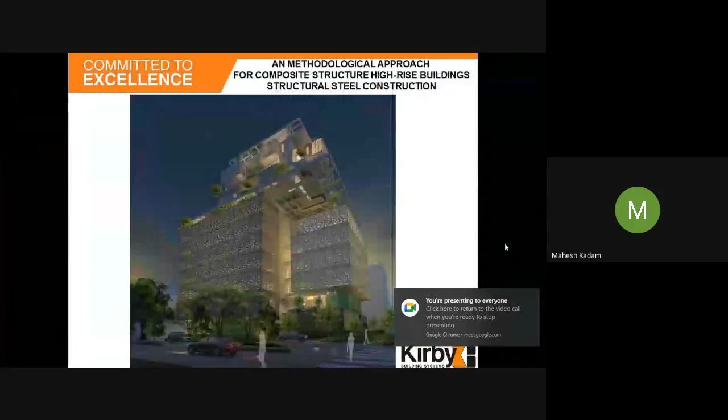Composite structures are in vogue, they are fast in speed, so we can get an earlier break-even. Composite structures extract the benefits of both steel structures and RCC members, making sections more slender without defeating the strength. So we get a larger floor space, which is value for money, and the flexibility of steel gives advantages for easier, higher vertical movement.

What is in the composite structures? The composite structures has 3 main constituents. One is the composite columns, which we call CFT columns, or we can have a simple non-composite I section columns.

Composite beams, steel I section beams with the girder and joist beams as intermediate members, connected with a composite slab with shear connectors, and reinforcement steel placed on that for shrinkage and temperature stresses.

In the design parameters, we refer to a number of design codes for dead loads, live loads, wind loads, imposed loads, and special loads. For seismic loads, we refer IS 1893. For concrete reinforcement, we refer IS 456, SP 16, SP 34.

For the steel structure design sections, like plate sections for flanges, for webs, and plate connections for beam connections, we refer IS 800.

For connections, mainly steel structures, these are prefabricated steel structures we get from the plant. There are 2 types of connections: nut bolt connections and welded connections. We dominantly do the nut bolt connections, for which we use HS bolts, referring IS 4000.

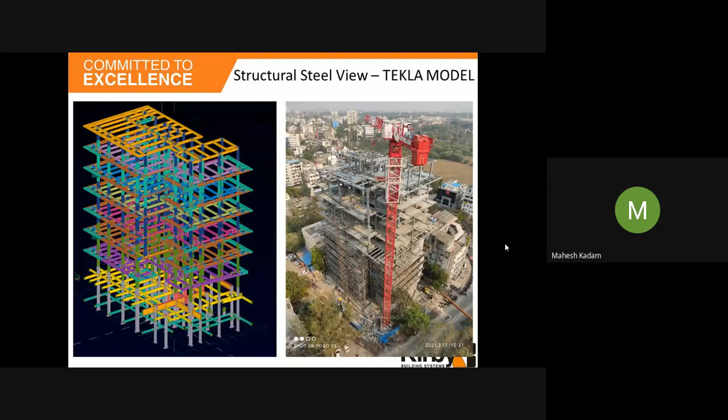Time is an essence of a project, so we need to understand our project timeline. For any project, we make the timeline from the LOI, from the conceptual stage, to the engineering stage, to the execution stage. Here, as we are the contractors, we are taking the timeline from the LOI date.

Till the total work breakdown is done, interlinking all the other dependent activities, with interdependency with RCC works, concrete placing, flooring, and so on.

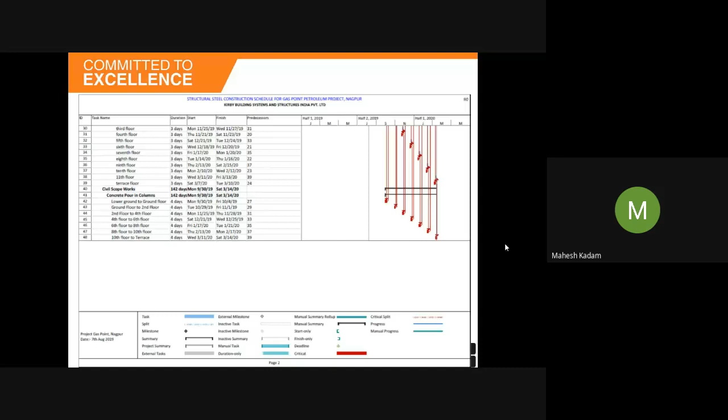For manufacturing, we have a very state-of-art fabrication facility located in both our plants. Here we are focusing on our Hyderabad plant, where we have a sophisticated CNC machine controlling the three-axis beam drilling and saw cutting line.

We have the production capacity for structural steel, even very complex jobs. We have a separate line that caters for 1,200 metric tons per month, with a beam depth of 1,000 mm and a drilling diameter of 40 mm.

For steel structure fabrication and welding, we have well-qualified coded fabricators and welders using FCAW, MIG, SAW welding, and other equipment methods, along with CNC tools and machineries.

For all the butt joints, we do DP testing and UT testing, and we have traceability from the coded fabricators and welders doing the work. So we do proper tracing of the materials, how it is done, where it is, and who has fabricated the beams or columns, so we can really understand it.

For checking, we have trained quality inspectors, because in high-rise structures, which are more dynamic since wind load acts as we go vertically up, we have to be more stringent about quality standards, and it has to be closely monitored and executed. Next.

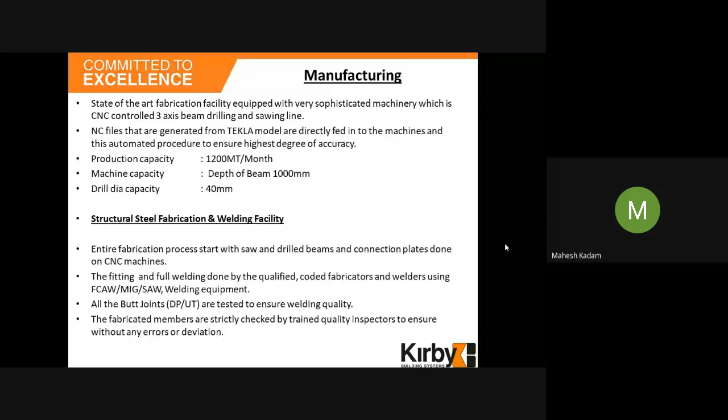This is typically what happens in a plant, prefab plant fabrication. There are multi-torch cutting machines for faster plate cutting, because these are all the end plate connections on both the flanges and the webs. So for the end plate connections, we do the torch cutting, and from that we extract the plates.

Then we have the submerged arc welding machines for very fine and quality welding of the end plates or the brackets and all. This is a typical built-up line fabrication, where the sleepers are there on which the columns or beams, typically I sections fabricated, are placed for the stiffener weldings and checking, the welding finishing, then the fitments, the brackets and all.

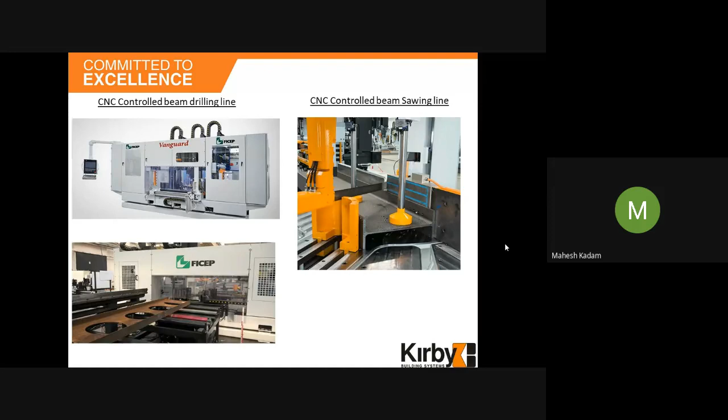This is what we call the sophisticated FICEP machine, which gives you a very fine, great tolerance for saw cutting and 3-axis drilling. What happens in this machine is that whatever outputs we take from Tekla, those are fed directly to the CNC machine, and accordingly the job gets done on these members.

A typical fabrication plant. The members which are fabricated as per requirements, we have to do blasting to achieve the surface finish of SA 2.5 standard, and then it is made ready for paint applications.

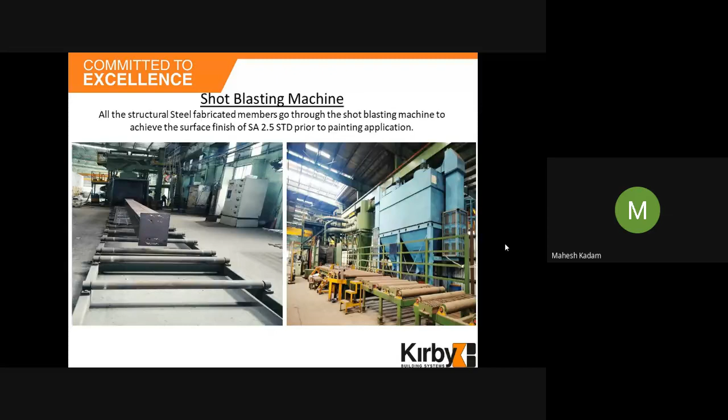That building height is 57 meters above ground level, and the cellar is 8.5 meters. It constitutes a lower basement, upper basement, coming about 8.5 meters to the ground floor level. Then there's a lobby area, reception area. 6 floors are office. The 7th floor is a service floor plus refuse area. And above are 4 floors of the duplex residential area.

The total steel component is 1850 metric tons and the deck sheeting is 1126 square meters.

So how do we do the work breakdown? Each column's transportable length is around 12 meters. So 12 meters means how much - we can cover about 2 floors. So per column, 2 floors of beams will be there. So how many members are there? 2 floors have 284 members. So 284 lifts will be there.

Per crane, how many lifts can we do in a day? Then how many days are required? Deck sheeting - what is the square meter of the deck sheeting? What is the average area laid per day by a team? And how many days are required for laying it?

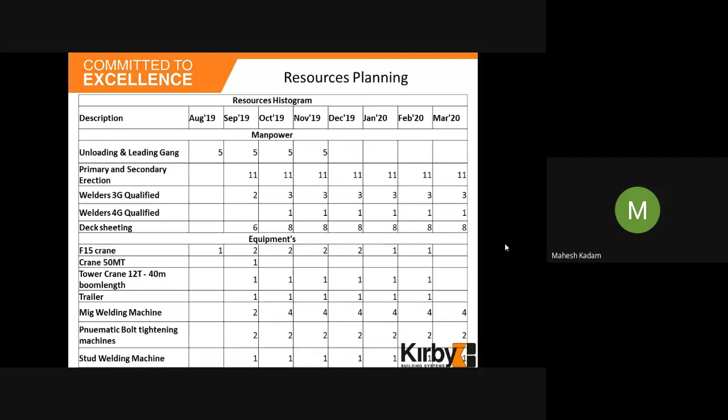Any structure, when we go about it, we should have a clear-cut erection method statement. Now, to get more clarity on the project, we need to specify the description of the project, what is the location, and what are the materials involved, that is the columns, beams, deck sheeting and all.

Then the members, how they will be erecting members, the erecting team, how it will be there, erecting equipments, then the tools and tackles. We have to in a very detailed way, at a micro level, do the study about it and put all those details so there should not be any miss when we are doing it. Then what is our safety plan, how it will be moving and all.

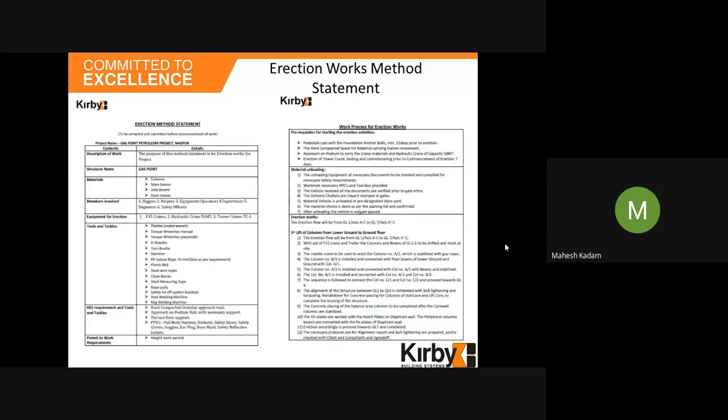Next, what is the prerequisite starting points and all about it, how we will be doing it. We have to clearly capture where the tower crane will be placing, what are the column connections, how the column connections will be happening, how we will be erecting it, how we will be placing it.

Any detailed minute part also we have to capture in this work method statement, and it should be documented, well documented. So this document becomes a Bible for our project execution.

Any project, what we have seen is that wherever high-rise structures come, what we have is paucity of space. What is that? Paucity of space. In city areas, where high-rise buildings come, we have area occupied on all the four peripheral sides, so we do not have sufficient area to stock our materials, what we are getting from the plant and all.

So we have to do a perfect planning to make it just in time. When we are making it just in time, we bifurcate the project based on how much it can be catered, how much space we have and how much it can do. So what we have done is divide this floor plate into two parts, priority 1 for grid line number 1 to 4 and priority 2 from 4 to 8. This is a phase plan, which we give to the plant backend also, and we do the planning about it, how the fabrication has to be done in this plan, what should be the sequencing.

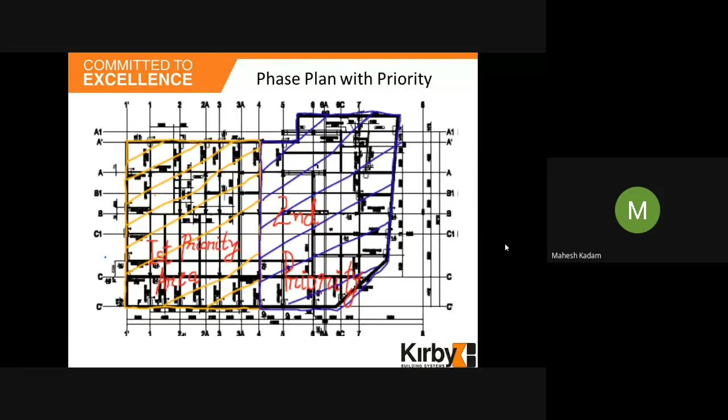Detailed list of our equipments, tools and tackles, right from the D-shackles, torque wrenches, at every minute level we have to chalk it out and plot it up. What are the chain blocks? What are the tons of the chain blocks? What are the retractable fall arresters and all? We should very speculatively jot it down on the paper.

Now another part is that whenever we are working in a high-rise building, there's the crane movement, where the crane is to be kept, where the crane is to be placed, because of the scarcity of space and all. So the demarcation of it is very clear. We have to be more clear about where the tower crane will be placed, and it will be executing without any hampering of the work progress, not only of the structural steel but also the civil works.

And what happens is that when we go higher up, it cannot happen that the entire building structure is completed and then the interior and finishing people come inside. No, it will go in a ladder activity. So as soon as we reach above the 5th floor or 6th floor, the below floors, the interior work starts.

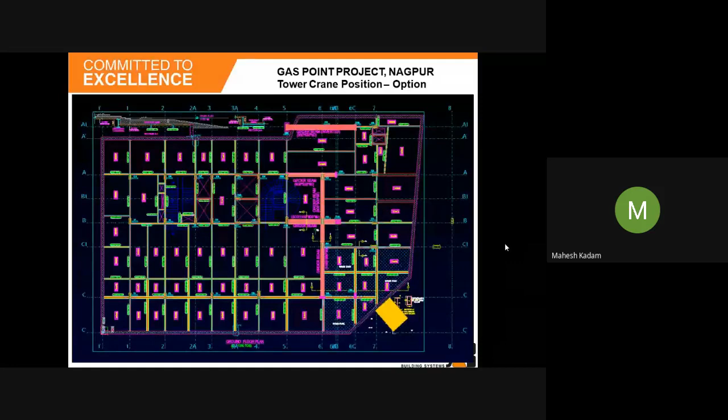So we have to be very clear about how the tower crane is to be placed. It cannot happen that the tower crane, our equipments, we are placing on somebody else's land, it's not possible. Now, in this project, we have two sides that are a road, it's in the heart of the city of Nagpur. So both sides we have a road, and on the other two sides, one side is our school, and the back side is a hospital.

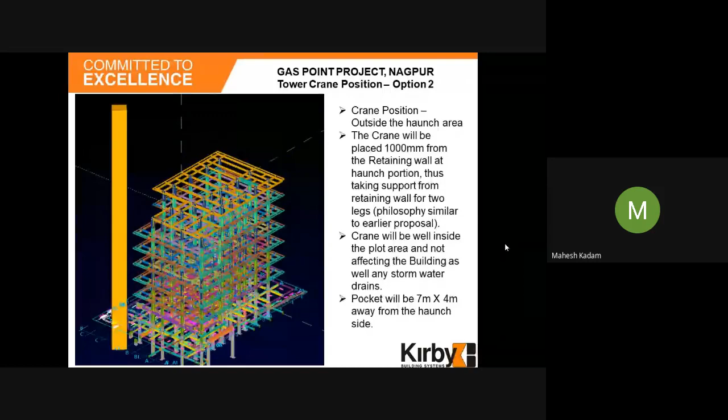For the tower crane we are placing, we need to understand the load carrying capacity and the boom length. As per the boom length, the lifting load carrying capacity of the tower crane changes. So we need to clearly plot our layout plan, and on that layout plan, we also jot down the lifting capacity of the tower crane.

As per the lifting capacity, we can make the steel member segments accordingly and give it to engineering for detailing and fabricating accordingly, so we can reduce the number of lifts. We can play with the lifts and save more time in this. This involves very accurate planning and execution.

This is a 3D view of the project, showing how it will go upward. When we are going upward, below the line, the deck sheeting and concreting has happened there.

The center part has the core walls. These are the lift core walls, and on all four peripheries we have staircases, fire escape staircases, and shear walls. Generally in these high-rise composite structures, the central core wall is an RCC wall, which acts as the spinal cord of the building, and the steel structures get connected with this spinal cord, giving us vertical alignment of the structure.

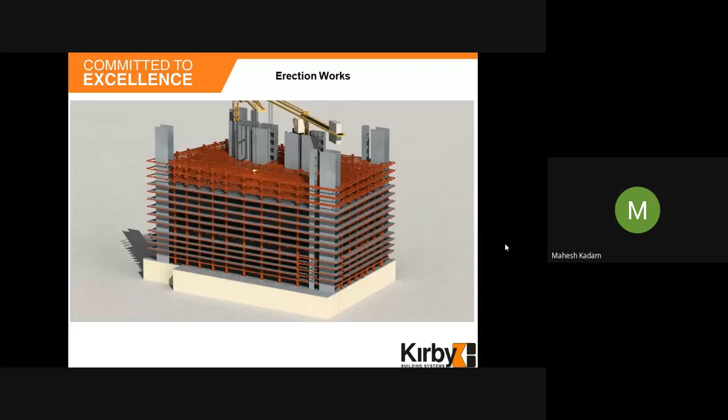We have a very detailed field quality plan, like a quality plan for manufacturing where we have MTCs, what we are doing at the plant, the cutting, the welding, welder qualification, welder quality checks, and material post-fabrication quality checks. Similarly, on site execution also, we should have a field quality plan.

In high-rise buildings, for any steel structure, the first point is about the anchor bolts. Anchor bolt setting is very critical because we need to know how the structures will be set. For the anchor bolts, we have to clearly note the center to center distances, the height of the anchor bolt above the concrete surface, the tolerances, and which codal provision we are following.

Next one is about the column base plate: what are the levels of the column base plates and the tolerances. For structural steel, we refer to IS code 12843 for all the tolerances and specifications for the erection works.

Checking the main column verticality, IS code specifies L by 1200 for a 30-meter building, and L by 1500 for structures going above 30 meters.

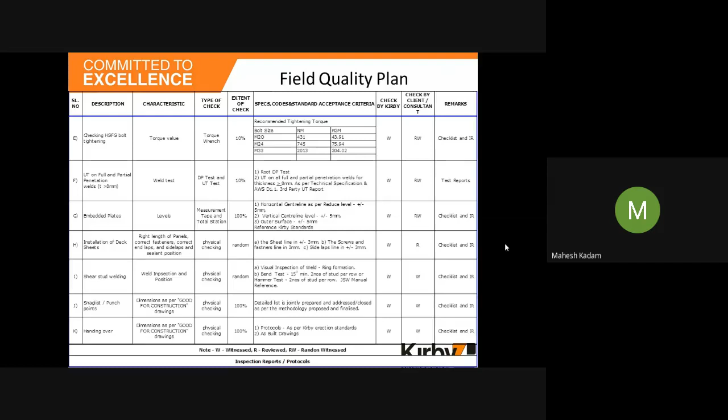Next, anchor bolts. These are the typical anchor bolts. We use 8.8 grade anchor bolts for high-rise structures. Anchor bolt setting, as I said very clearly, is very critical, and we have to be more stringently followed about it.

We use a total station for checking it. The northing easting points are marked as per the layout, and each and every bolt is checked, because in a column pedestal there are a number of bolts. So we take it as one cluster, and for that cluster we have to check what is the northing easting, whether we have achieved that northing easting or not, and how much tolerance is there.

Secondly, the box column is away from the center line. What we do is get from the architect drawing the center line about the structures, center line about the columns of the foundations, center line of the column. But here what we are using is box columns, CFT columns, or I-section columns, so that center line won't be visible.

So we have to transfer it to the edges, to the northing easting point. These northing easting points become a base which we have to follow from the anchor bolt level, that is the base plate level, till the top of our building, whether it is a 72-meter height building, a 67-meter height building, 83-meter height building, or any 100-meter height building.

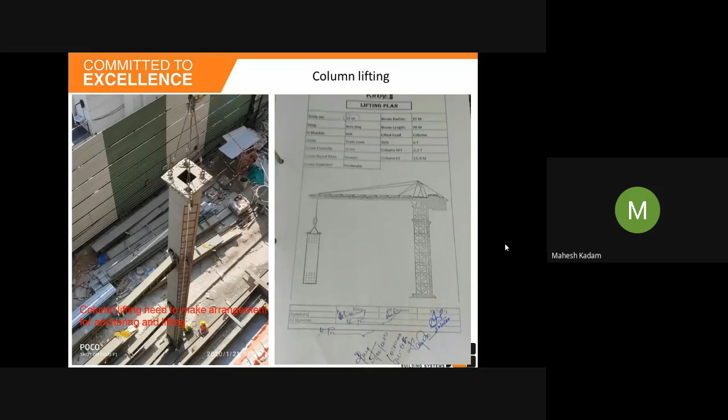Next, when the columns are placed and the minimum main beams are provided, we come to the next point about the protocol for a verticality check. Verticality check is more important, what we crudely call a plumb report. Now what is verticality? That is the northing and easting which we have passed on the base plate of a column, and we are checking that northing and easting.

So for any 73-meter height building, for example, L by 1500, we get a tolerance of 46mm. So at the base plate level, at ground level, and when we check it at 73-meter height, the tolerance for the building should be that each column's northing and easting should be within 46mm only, not more than that. If it is getting away, then every lift of a column, what happens? A 73-meter building cannot go with one column. We get it as columns within a size of about 12 meters.

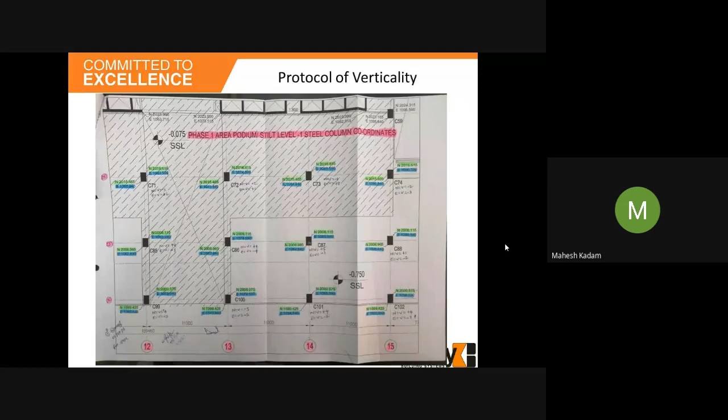Columns and maintain it within the tolerances.

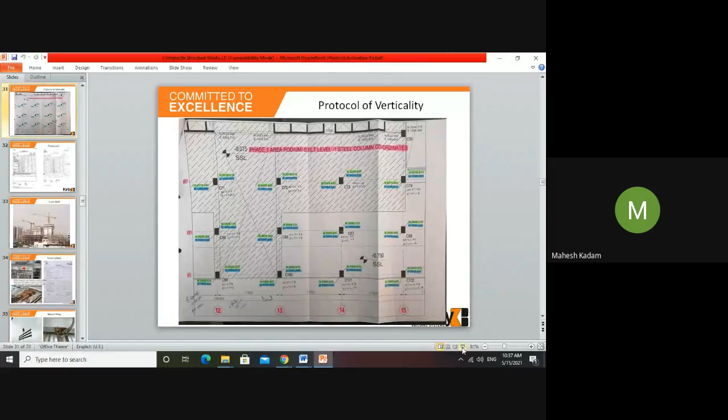We maintain the protocols of the columns vertical stage by stage, which are jointly signed. We check it with a three-tier checking process. One is the site people who are doing it, the second is the consultants, and third is the client team also. So we get a three-tier checking, three times we check it up, yes it is checked and we are going ahead.

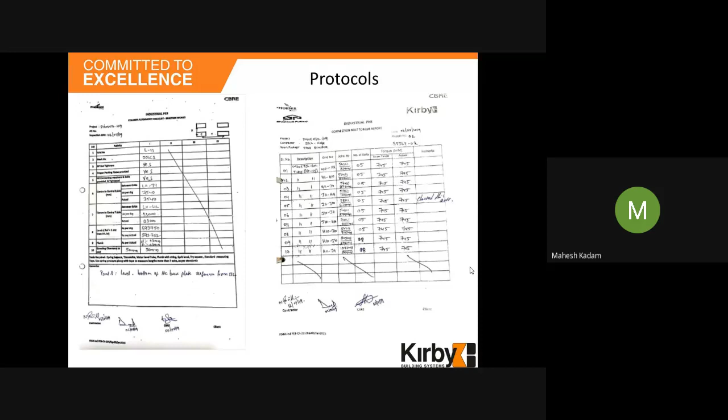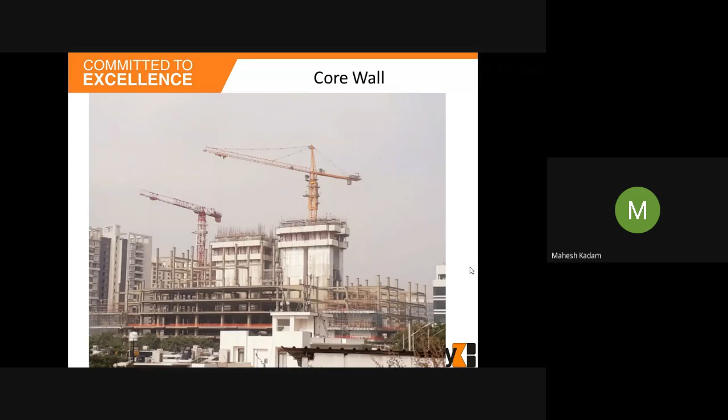So what I showed you about the 3D model - now this is about the actual core wall, how it will be there, and the columns and the beams, connections and all. Insert plates.

Now what we are seeing is that the core wall, the beam is going to get connected with this core wall. Core wall is a concrete structure done with a slip form. So slip form column, concrete structure, the beam has to be connected. Here we need to have a steel plate. So what we do is provide IP plates, that is the insert plates, to which the beams will be connected with our cleats.

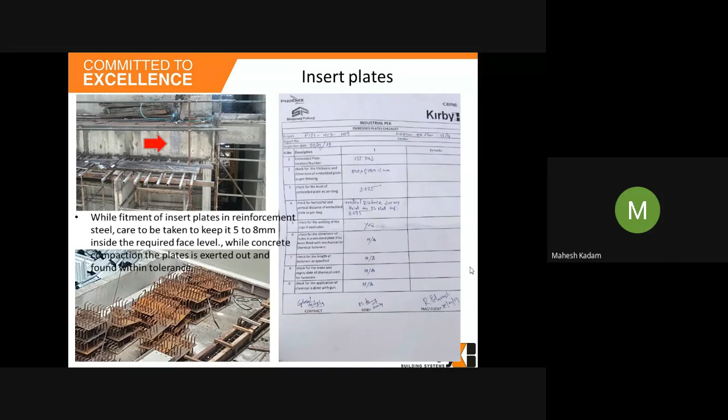Next part, number of lifts. The beams are the lighter beams, so the beam weight per beam will be maximum 800 kg. In this structure, we have 11-meter beams at 585 kg and 8-meter length beams at 386 kg. With such beams, we can go with multiple lifting. We have to very clearly mark out the CG of the beams and provide multiple lift brackets, tying it and lifting in one go.

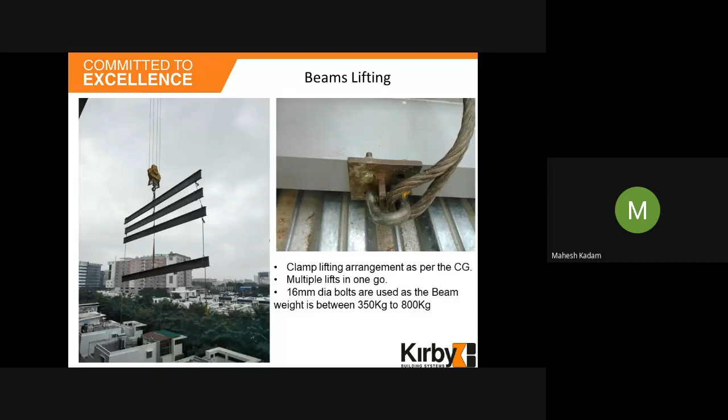So what will happen is we get the beams - if we go with 4 beams, the number of lifts are reduced. This gives us speed in the structure, moving faster. The crane movement will be faster.

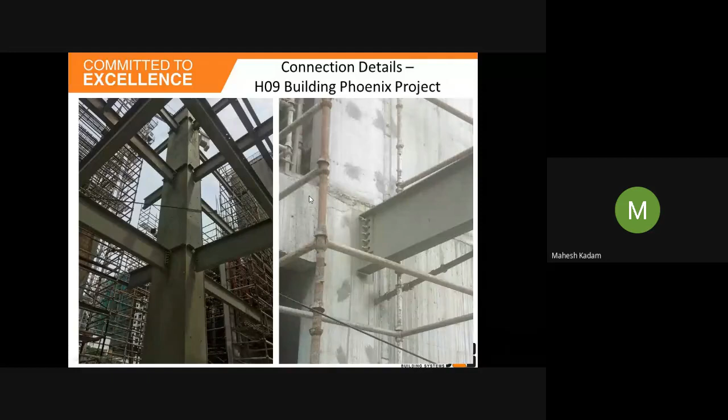So if you see on the right side, the picture shows the core wall, that is an RCC wall, with the insert plate, where the beam gets connected with the fin plate. On the left hand side, we see the main CFT column, a tubular column. For the tubular column also, there is a fin plate to which the beams are getting connected. When the fin plate and the beam connection is happening, we call it a shear connection.

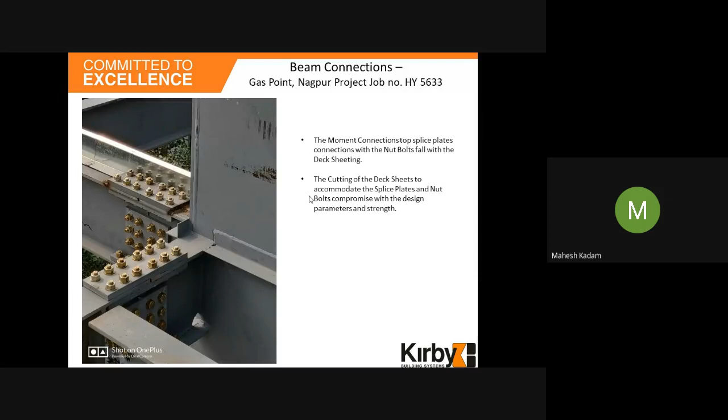Now this is a typical detail about the moment connections, wherein there is a bracket welded to the CFT column, and for the bracket we connect the beams which have a splice plate from the top flange and bottom flange also, and in the webs. Typical pictorial of nut bolt tightening.

In a high-rise building, we have to be more cautious about safety tools and tackles. What are the safety tools we are using? This is the beam roller, which anchors with the beam top flange, and your safety harness is connected with this. Any spanner or tools and tackles, those have to be tied with a tagline. So nothing - you have to avoid a fall.

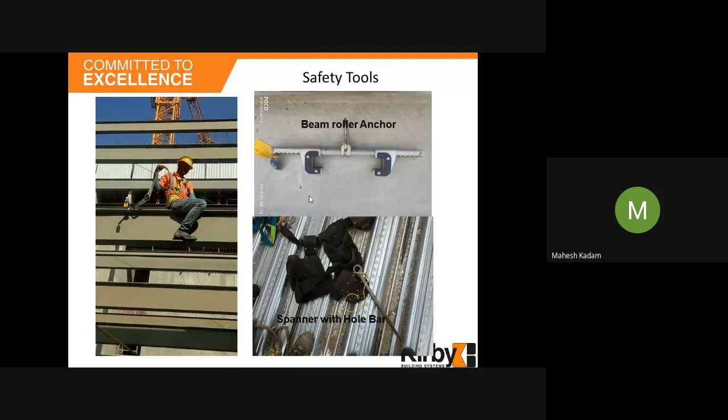Next, fall hazard. This is a typical battery operated torque wrench, wherein if you see in the picture, 4067 Newton meter is the torque value of a bolt. So this BTM 3000 lithium, which we used in our Phoenix project, has a minimum torque value of 678 Newton meter and maximum of 4076 Newton meter torque value. So we fix the designated torque value and start operating the machine, and the bolt is tightened to that torque value, and automatically when this torque value is achieved, the machine stops. So we get the defined torque value - the nut bolts are tightened at a defined torque value.

Second challenge is that when working in a city area, there is noise pollution. Steel works are happening, concrete works are happening, continuous machineries are working, and people staying in the vicinity get annoyed. In this project, where there were affluent people nearby, they started complaining, so we were forced to go for a thought process. We tied up with ABS and brought down the noise - a less noise generating bolt tightening machine of 35 decibels. Our pneumatic bolt tightening machine makes 95 decibels, while permissible noise in city areas is 40 to 45 decibels.

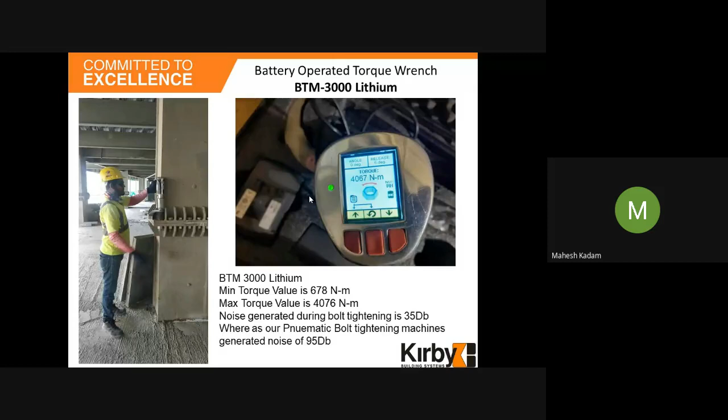As earlier discussed designing as per IS 800, there are 4 types of main connection detailing: column to column connections, column to beam connections, main beam to secondary beam connections (those are the joist beams), and core wall to shear wall connections.

In these connections there are two main types: the fin plate connection, which is a shear connection, and the moment connection, which uses the beam bracket with splice plates.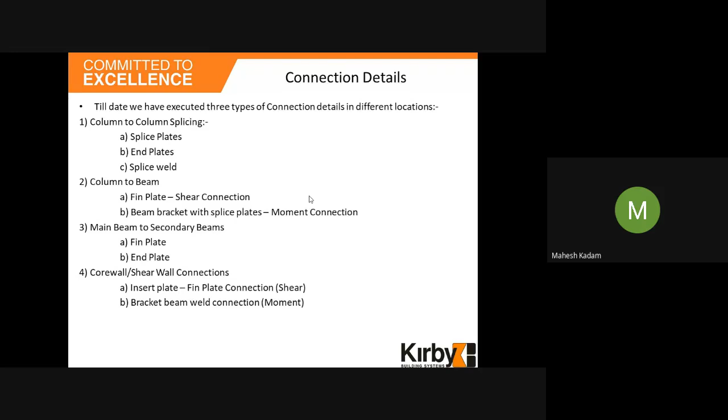For column to column connections, we have three dominant types. One is the splice plate connection for I-section columns. Then for I-section or CFT columns we can have end plate connections, and also splice welding connections.

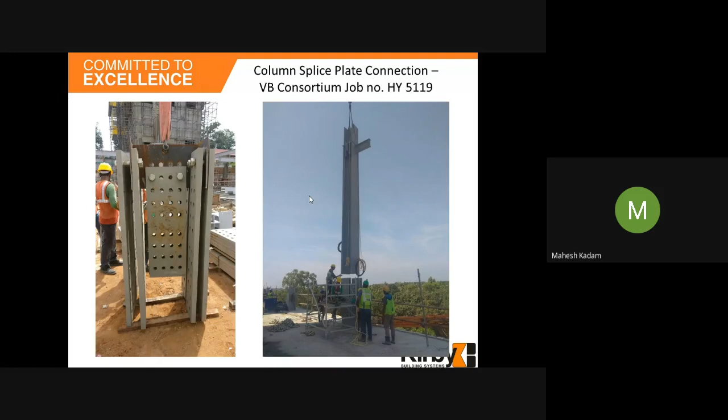With this type of erection, we require only 4 to 5 people on top. That is the beauty of this method of working.

I derived one method after a lot of thought process went into achieving safety when working vertically up to 10 or 20 meters height. On peripheral columns outside the structure, we have to be more careful about the safety of the person de-shackling the column from the crane.

For de-shackling, we use the remote ground release shackle. These are dominantly used in heavy engineering works, generally in shipbuilding and power projects. This was the tool we derived, did a lot of Kaizen on, and developed in our factory.

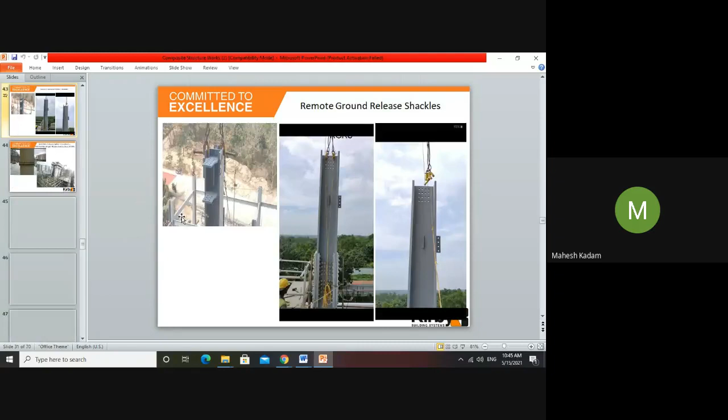Tapasiji, on the left hand side there is a photo. Can you click on that photo? Double click it. It's not starting, okay, take it, leave it. Let's go to the next slide.

Here I wanted to show a video clip. In the remote ground release shackle, there is a cotter pin and a piston. First, when the column is placed and tightened up, we remove the cotter pin, and then people standing on the bottom platform pull and push so the piston is brought back down, releasing the column from the crane.

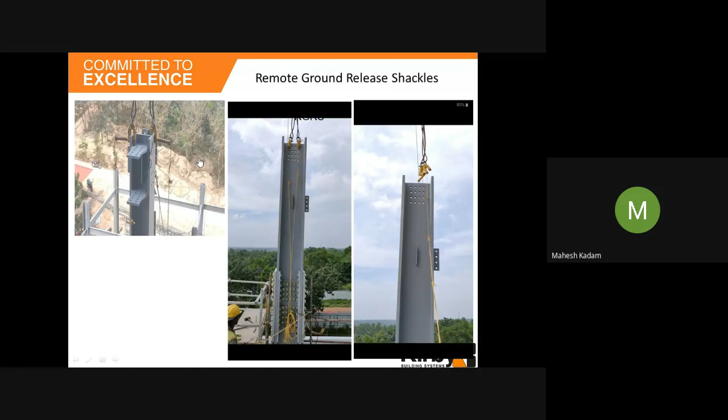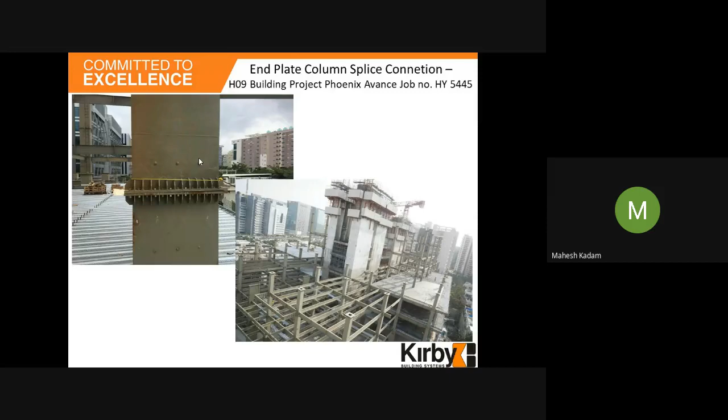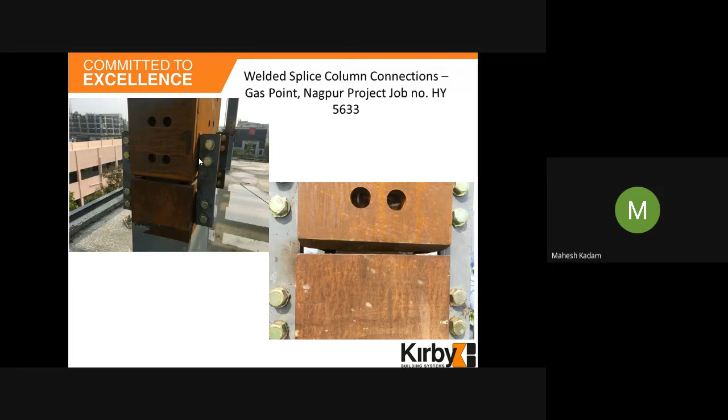This is the third type, the weld splice connection. This is also for tubular columns which are concrete infilled, but here there is no nut bolting, it is a welding connection. The plates and nut bolts you see are only erection bolts. Once erection and alignment are done and welding happens, these have to be cut and removed.

These are typical male-female connections. You can see in the bottom columns there is a red colored projected member. When erecting the columns from the top, unlike the splice columns where we used a crocodile method, here it will be a typical male-female connection.

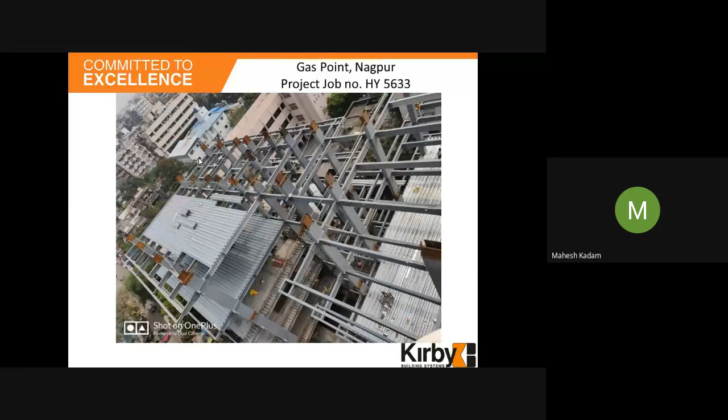Site welding, root and all for the welded connections. Here you can see the connection plates, where the erection plates are removed.

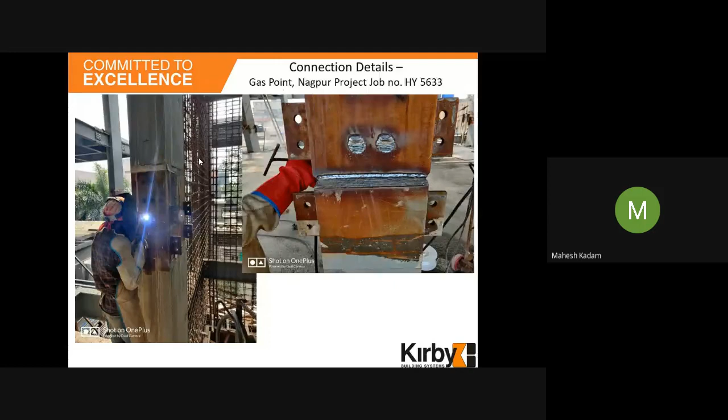Next, when we do the welding on site, any welding, we have to be doubly assured about what we are doing. So for root welding, we do 100% DP testing.

For welding filling, which we do with MIG welding, we did UT testing. For the columns, we did 10% UT testing, and for all the horizontal members, since they carry the load from the top, we used 100% UT testing for the beams, box beams and box girders.

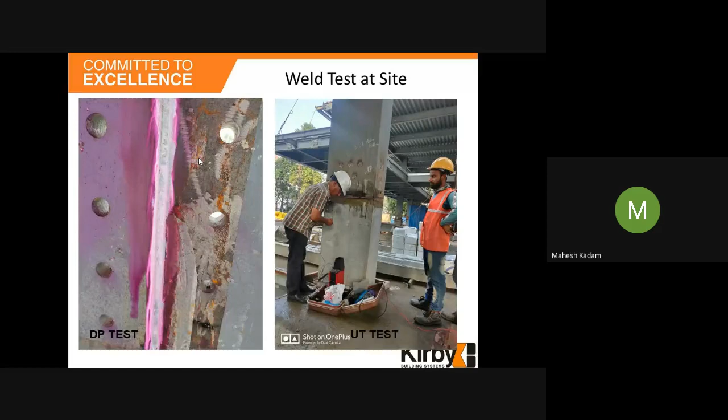This is the project we did for Suntec in Trivandrum. Singapore-based design by Zhurong, PMC by JLL, and executed by Kirby.

This is a beautiful architectural building. At bottom levels 54, 58 and 62 meters, you can see the cantilevers projecting outside the building in all directions. On the left hand side, the cantilever is 10 meters away from the building, and on the right hand side, it goes 5 meters away from the building.

This was a big challenge when we took up the job. We were involved right from the engineering, deciding the positive camber to be made, the box sections, how the tubular sections should be fabricated and connected, and how the erection should happen.

At 54, 58 and 62 meters, these three outer cantilevers had major safety concerns and hazards. There was no chance we could do the connections from the ground, so people had to travel outside the building to do the erection.

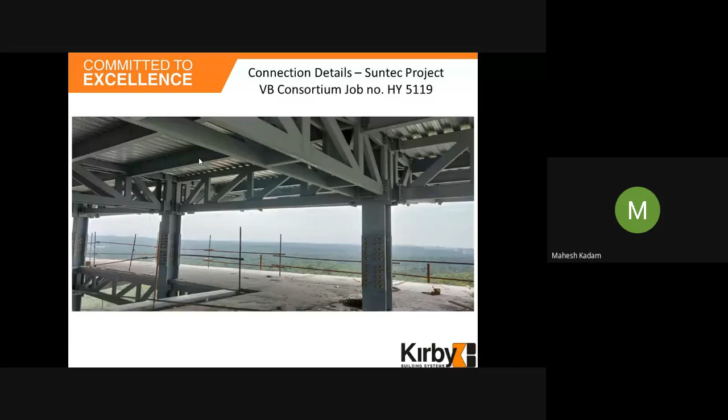These are photographs showing how difficult the task was, with people coming out of the building to do the work.

Our challenge was that we did a pod lifting. As shown in the yellow hatched portion, we assembled the cantilever portion at ground level, and with the help of a crane, lifted it up and connected it with the main truss beams.

We also had to do a lot of site kaizen, figuring out the philosophy for how to make the deck sheeting. Safety was a main concern, and we achieved it through a lot of engineering, brainstorming and simulation, successfully executing the project.

The entire structure has a positive camber of 10 mm.

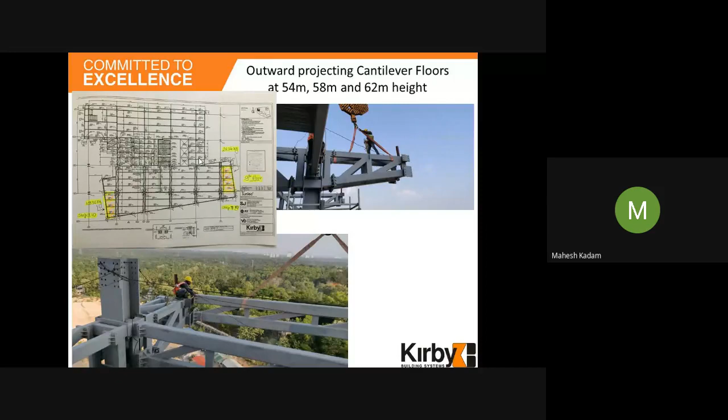Now we'll come to the last part of the project, the composite section, which is about the deck sheeting.

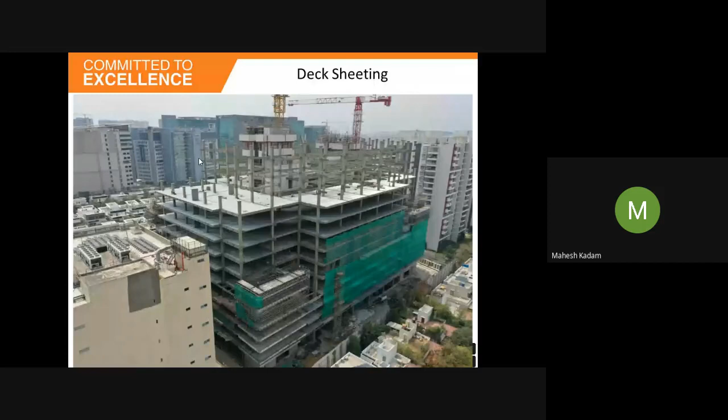In deck sheeting, there are a number of members involved. One is the profiled TR section deck sheets, then end caps so that when we have the profile sections, the concrete doesn't spill over from the profile deck sheets, which we close up with end cap flashings.

For fastening the deck sheets, we use SDTS screw fasteners, 16 mm by 19 mm, for sheet to sheet lateral connections, and 24 by 32 mm dia screws for deck sheet to beam connection fastening.

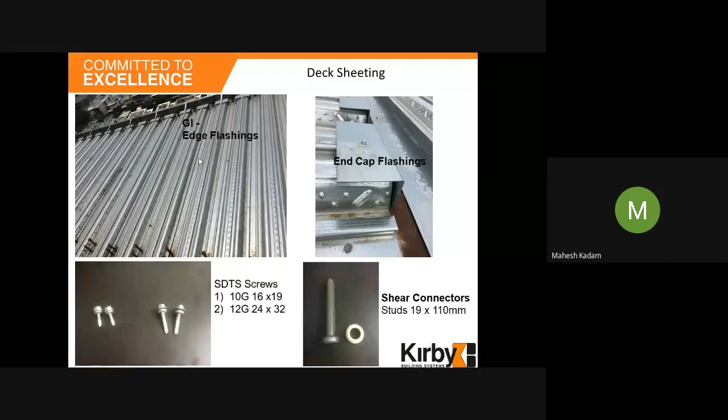On the right hand side are the shear connectors. This is the main part of any composite member, connecting the deck sheeting and the beams. The shear connectors have to be fusion welded.

This is a typical profile of a deck sheet, different from other deck sheeting seen in other projects. In a composite section, a typical TR60 or TR80 has a crown at the top.

This crown mainly acts in sharing and arresting the shearing of the members, so the concrete and the deck sheet are connected properly with no gaps generated. The concrete doesn't leave the deck sheet, and it ties properly, with the profile giving strength to the entire homogeneous composite member.

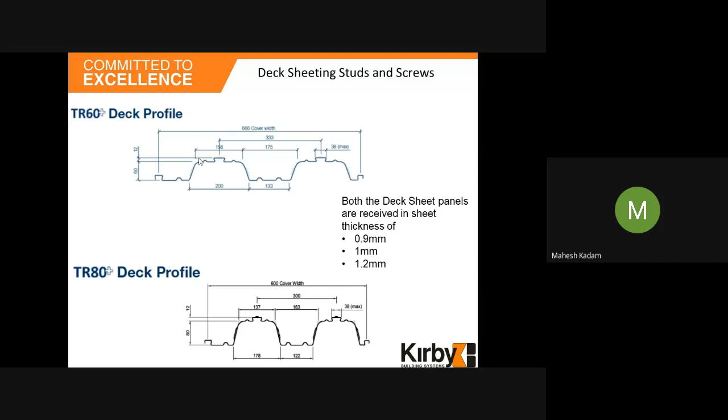Actually, my presentation has got stuck. Can you give me 1 minute? I will check whether I can load it again. Yes, I'll manage it. I'll stop sharing, sir.

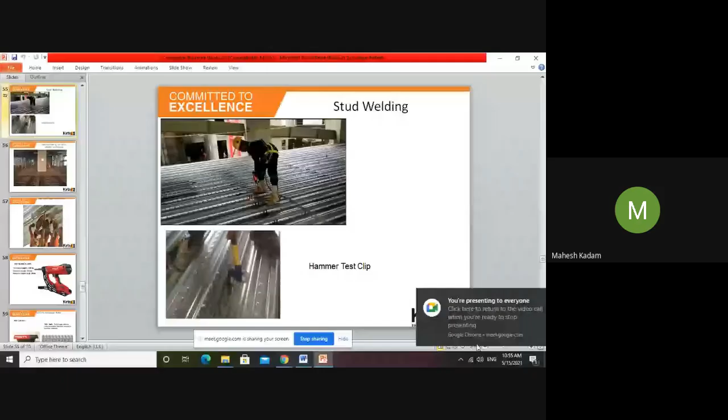In hammer test, what we do is hammer the fusion studs. We check it up with a hammering and bend test that the stud should not be broken away or sheared away from the fusion connecting between the deck sheet and the beams.

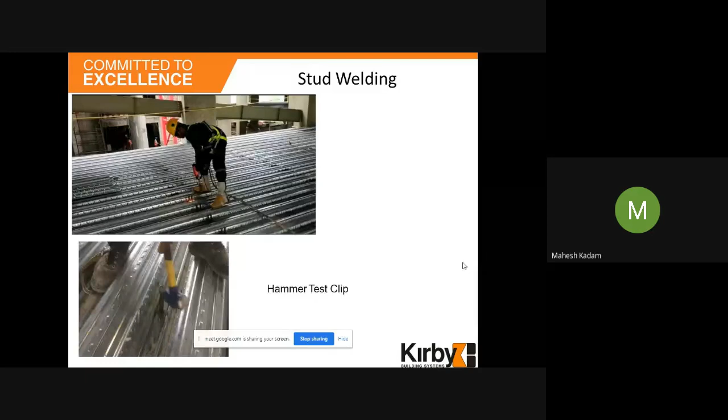Now this is about the case study of the data center project for the Ctrl S in Mahape. Here the designer has used the beams also, got inbuilt concreted with the deck sheeting, because in the data center the loading parameters are too high on the floor plate. So instead of increasing the depth of the beam, he has gotten composite action with it in totality.

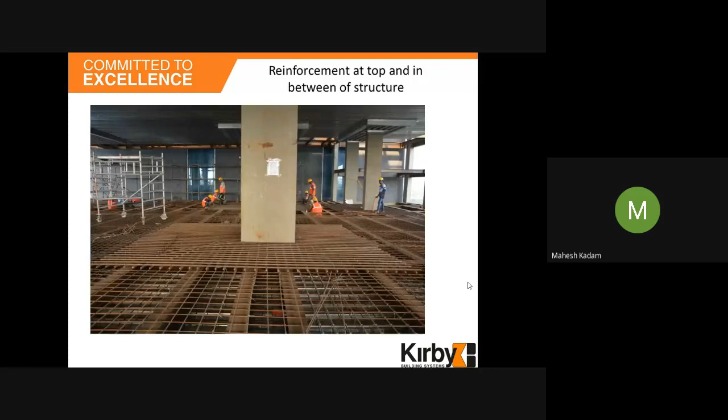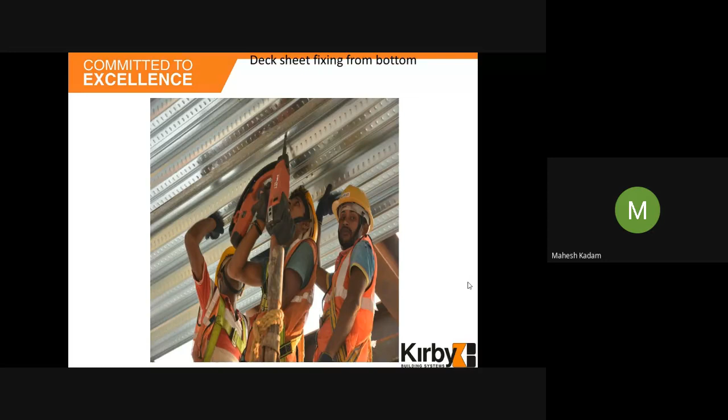So the deck sheets were connected with the beam in a soffit, and we use this for the connection. Normally our drilling screws cannot go in this position - it can go from top to bottom but not from bottom to top. So here we use a special Hilti gun.

This is the Hilti gun, which has a weight of 4 kg, a fastening intake of 40 nails in a cartridge, and the length of a fastener is 39 mm. It's like a typical bullet gun - we just place it in that location and shoot it, so the nails get connected there.

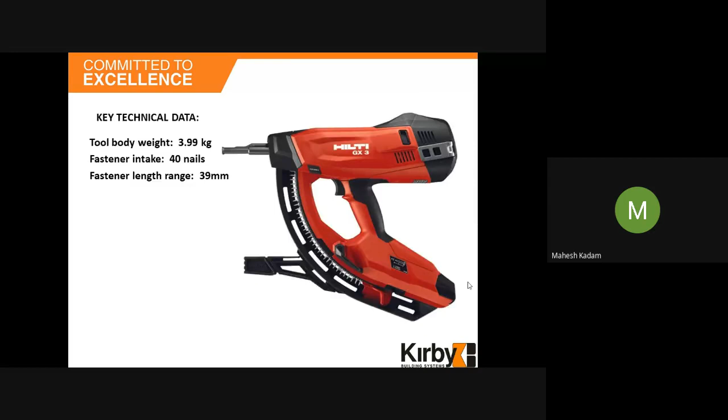This is a typical safe platform what we have prepared, and the people standing there connecting the deck sheet from the bottom of the beam.

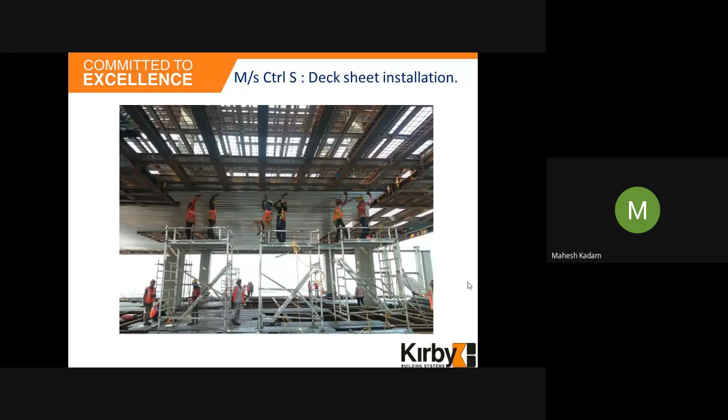This is a beautiful finish what we got from the bottom. It's really a great challenge to achieve such a beautiful finish with steel members. With the column soffit, if you check the beam soffit level, similar to what we call in our PT slabs and flat slabs as a column capital - similarly here the column capital is made.

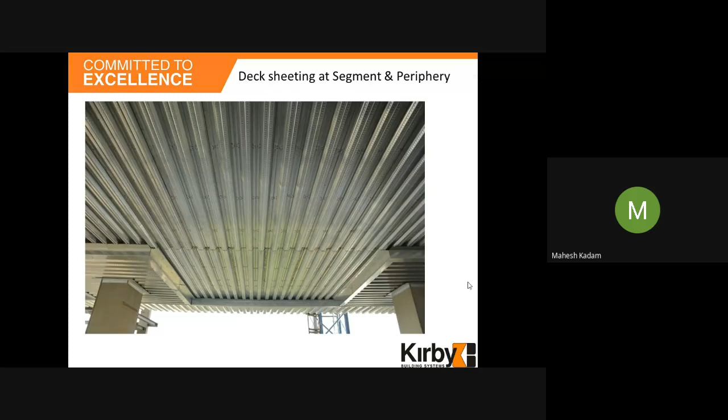Ctrl S building completed in Mahape, Mumbai.

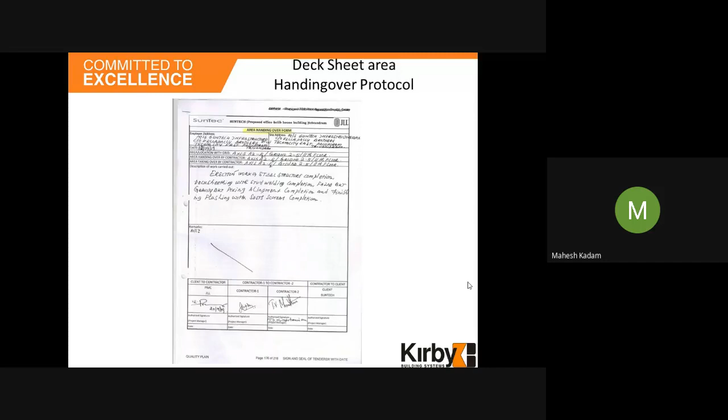This is a typical deck sheeting area handing over protocol. Any job we are doing, we have to hand it over to another agency, like the civil agency who is going to do the concreting. So that inter-transmission, we have to hand it over to the client also. This is a typical handing over protocol.

Now we come to the part of how we get the fire insulation. Generally the concrete, RCC concrete, is having - we get a 2 hour fire rating, but still it's a challenge. So we have to be more careful about how to achieve the fire rating for it. So deck sheeting is designed in such a way, composite deck sheeting.

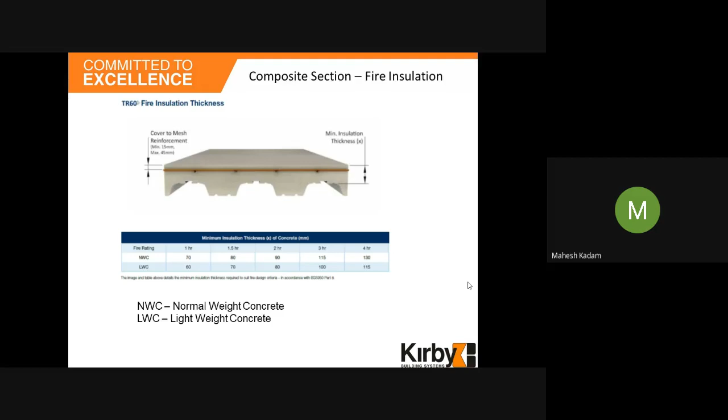So within concrete placing, for nominal weight normal weight concrete, with 90 thickness of concrete we get 2 hour rating. And lightweight concrete with 80 thickness of concrete, we get 2 hour rating. So this is the way, if you check up what is the insulation thickness, shown in the drawing also, and the cover also.

Now we talked about the deck sheeting. Now we have to talk about the horizontal members - those are the beams and columns. There are two types for the beams and columns which are exposed steel structures - we do two types of fire coating, fire protection coating. One is intumescent paint application - at increased temperature it expands at a ratio of 1:50, thus controlling the heat and temperature to reach the steel, and we get a 2 hour fire rating.

Next is about vermiculite fire stopping. Vermiculite fire stopping spray is a cementitious fibrous plaster applied with a spray gun. The normal thickness is from 10 to 70 as per the fire rating.

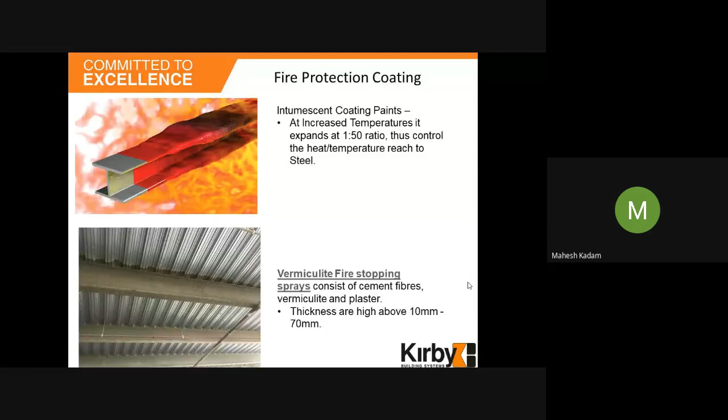Now you can see the beams which have a vermiculite coating. This coating has a very rough finish, so it's not aesthetically good. So whatever gets covered below the false ceiling, we can do with vermiculite coating because it is much more cost effective - about 4 times lesser than intumescent paint. But the columns are an exposed structure, so if we do cladding there, we'd defeat the floor space purpose. So on the columns and exposed surfaces, we apply intumescent paint.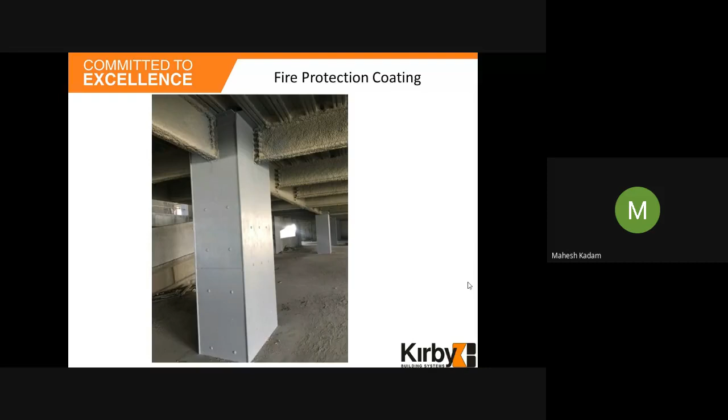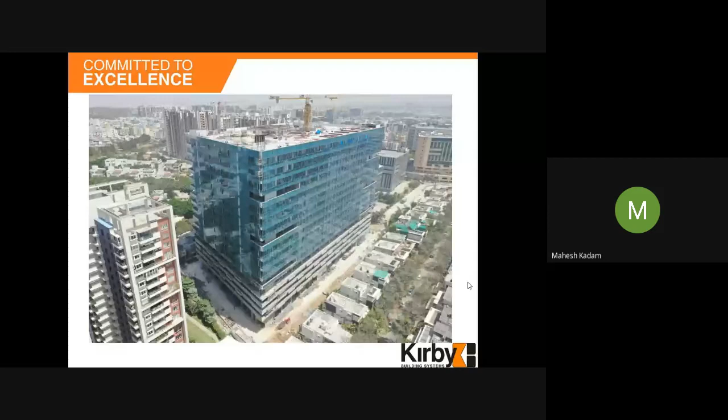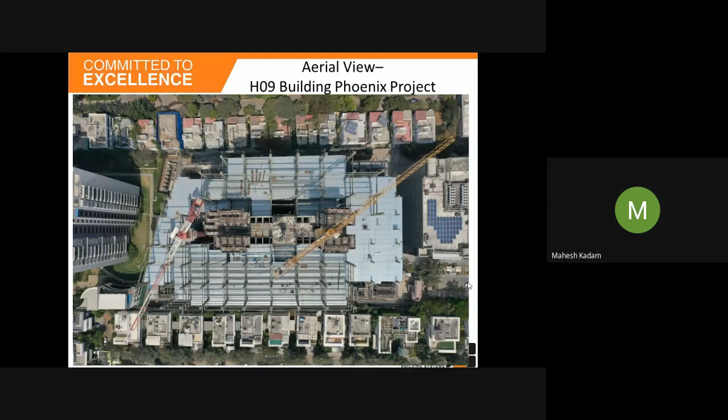It's a very beautiful, challenging building - both the cranes, because of space constraints. Because of the space constraint and very stringent norms of a residential zone, there should not be aerial coverage of any construction equipment above the vicinity buildings. So we had to bring both tower cranes inside the building. If you can see the yellow color and the red and white color cranes, both were brought inside the building, and we did the successful execution of this project.

All four projects - right from Trivandrum, the Suntec Trivandrum project, then the MAPE project Control-S, this Gas Point project in Nagpur, and the Phoenix project - all four projects we have executed, we have successfully achieved within a tolerance of 6 mm. We have not gone to 46 mm; we achieved it within 6 mm. All the columns are within 6 mm for this big height. That is the biggest achievement. We have achieved it with speed and quality.

We always say that in any project, there are three main parameters: one is safety, second is quality, and third is on-time completion. All three parameters we have achieved very successfully. There is zero time loss in any of our projects, so we have achieved safe man hours. The quality, yes, within 6 mm - all quality stringently checked, all quality parameters achieved, all protocols successfully completed, jointly signed off, handed over to the client, and timeline achieved, yes.

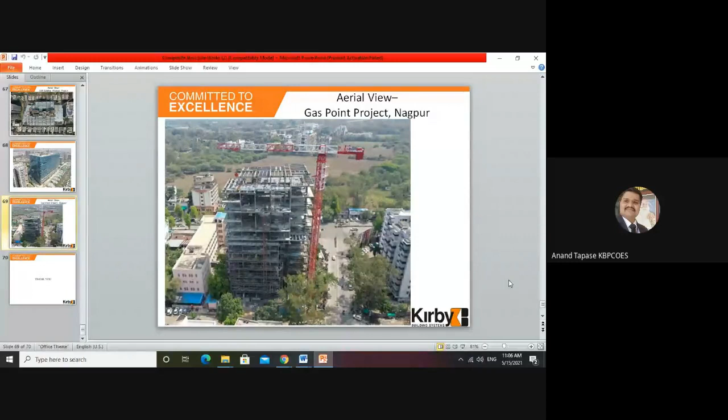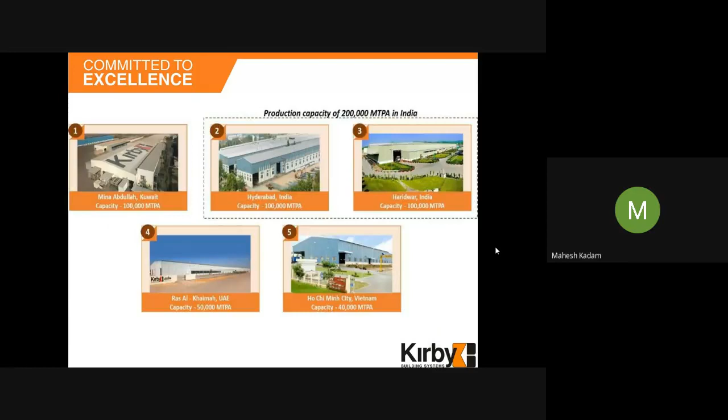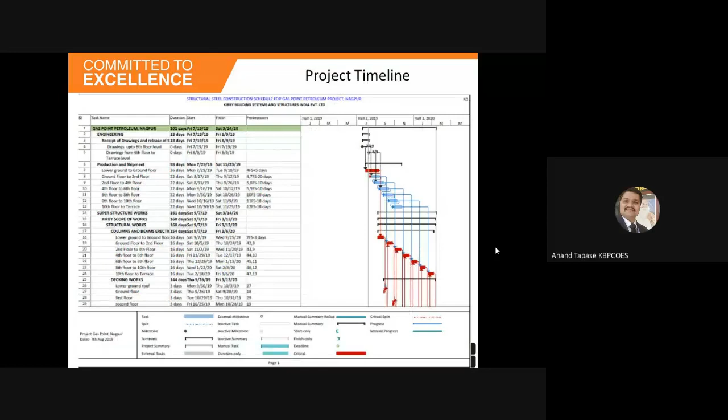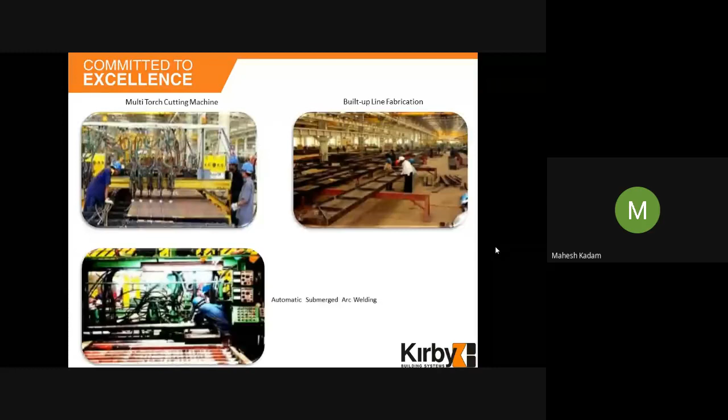The first one is, do you maintain a regular risk register during the project execution? Yes, we have to. We call it a project level risk analysis. At the initial stage only, we start it up - what are the risks involved. In the erection method statement, when we get the project, we go through a thought process and start plotting the risks. One is financial risk, whether there's any financial risk. Second is timeline risk, safety related executional risk, and all. Time to time, we check on it.

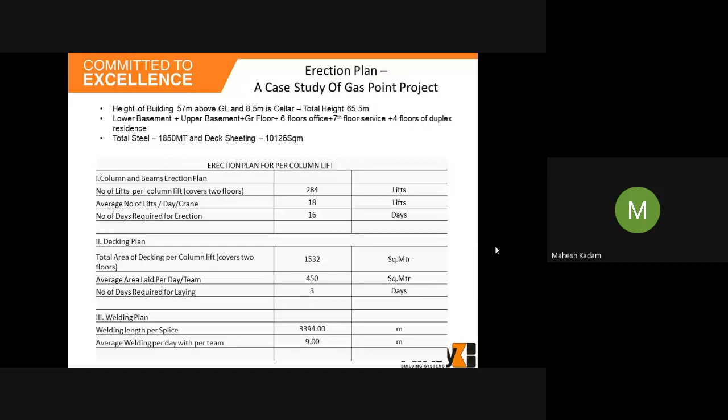We have to plot it every week. Safety reports come monthly. We have to give monthly or fortnightly financial progress and execution progress reports, capturing how we have achieved it, what risks are covered, and how we have proceeded further.

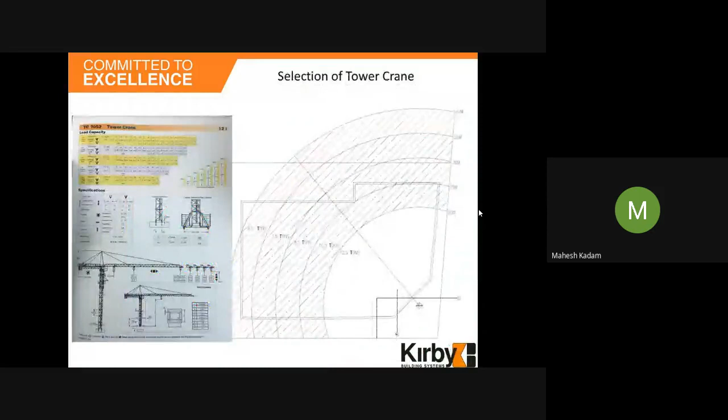Okay, and one more question. Are there any placement opportunities for our students, and what is the eligibility for the same?

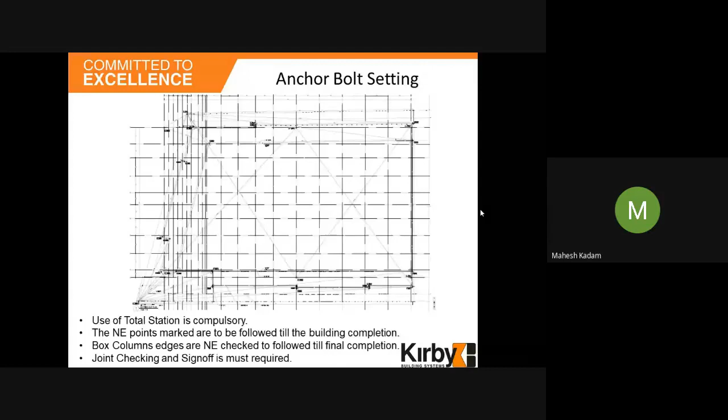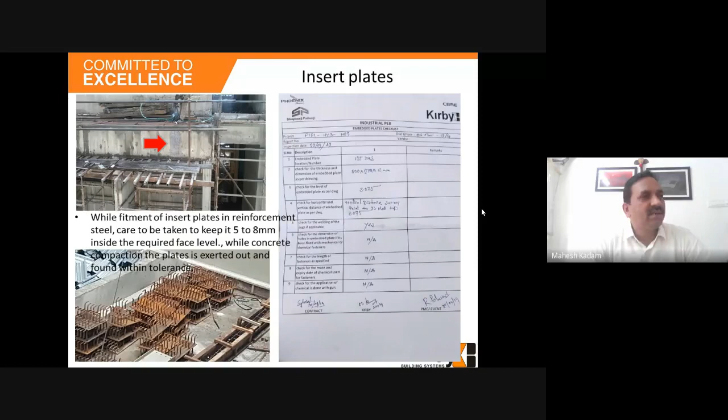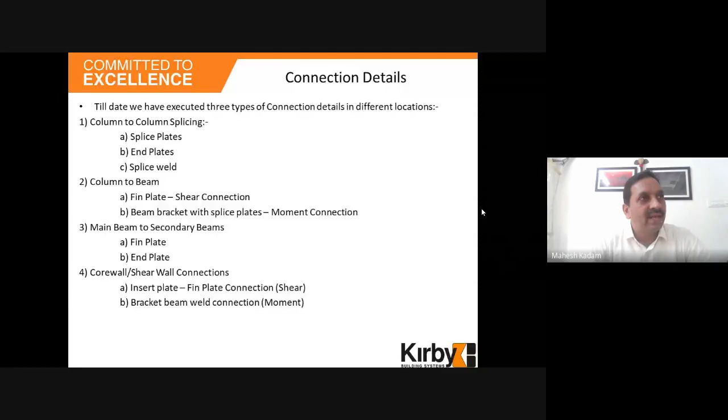To be honest, yes, placement opportunities are there. We are looking for engineers, but for the last 1.5 to 2 years we have had a really challenging part in the construction industry. Structural steel and PEB works are a very different engineering field, so it follows a lean structure, and when we follow a lean structure, the requirements become too strict. But yes, definitely we have opportunities, and we'll get back to you from time to time.

Thank you, ma'am. Any other participants? Yeah, good morning Mahesh, Abhay here. How are you? Doing good, Abhay. Nice presentation, I just have one quick question.

You just mentioned regarding this risk register and risk analysis. Do you use any specific tool for that?

No, what we do is generally general tracking with MIS reports only. We do it with Excel formats for financial tracking, with S-curves and all. For work progress also, we use the same MSP output we get, then plot the S-curves and check where we are going. In our weekly and monthly progress reports, we capture the reasons for any slippages, and for safety we have our severity index capturing. So nothing specific as a different package that we use.